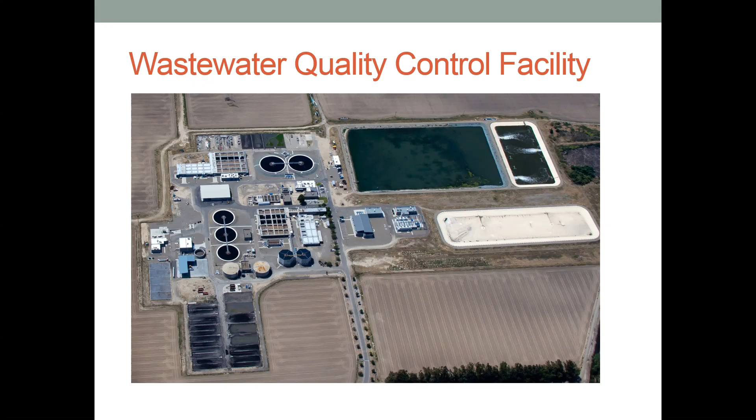The city's wastewater quality control facility, known as WQCF for short, is a 12 million gallon per day plant. Over the years, the plant has gone through several upgrades. Currently, two new digesters and a CNG facility are being constructed. Here's a view of one of the digesters being built, along with the surrounding CNG facility.

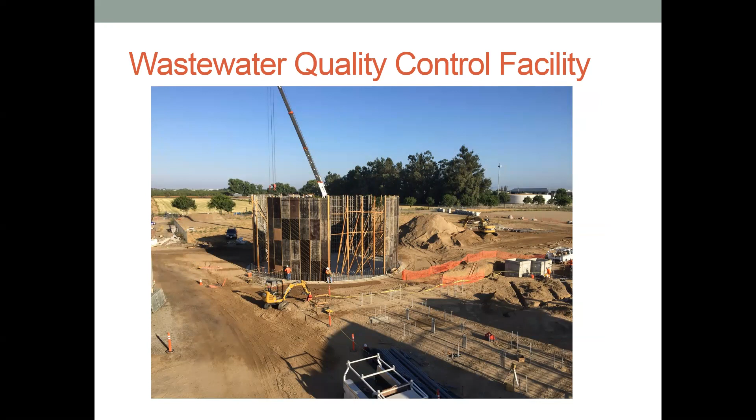The water, sewer, and storm systems of the city are composed of 300 miles of water lines, 250 miles of sewer lines, 250 miles of storm lines, 80 storm stations, 20 wastewater stations, and 19 potable water wells. A large part of these assets have been entered into our asset management program.

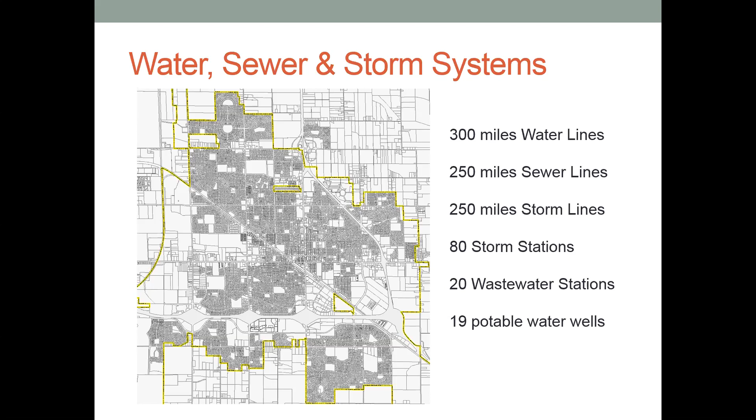The agenda topics that I will cover today are asset management lifecycle, asset hierarchy, asset naming standard, and computerized maintenance management system, also known as CMMS.

I know some of you may be thinking, why do I need this? You need it if a regulatory agency may need to see maintenance records during an audit or a violation.

Complex equipment is becoming harder to maintain. Currently, you're running your facility in a reactive maintenance mode, or paper work orders make it hard to schedule work or generate a report.

If you apply this, the facility will run in a more proactive maintenance mode while reducing the reactive maintenance. An asset management program will be the repository center for maintenance, planning, scheduling, and reporting of work orders.

Now I will talk about the asset management lifecycle. How I began my journey for the Public Works Asset Management Program was after the CMMS was newly installed. I was asked to administer the program, but having a CMMS software does not mean an asset management program exists. CMMS is just a portion of the program. The goal was to launch the CMMS software for department use, so I took the software from test servers to the production servers.

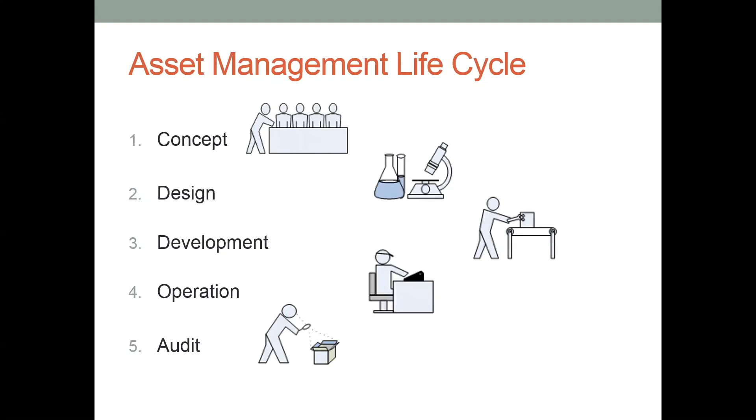I started in step 2, design, by developing the asset hierarchy. Here we organized the public works facilities into categories. Having meetings with staff for input created the current hierarchy. The goal was to set up the hierarchy in a way that fit our organization.

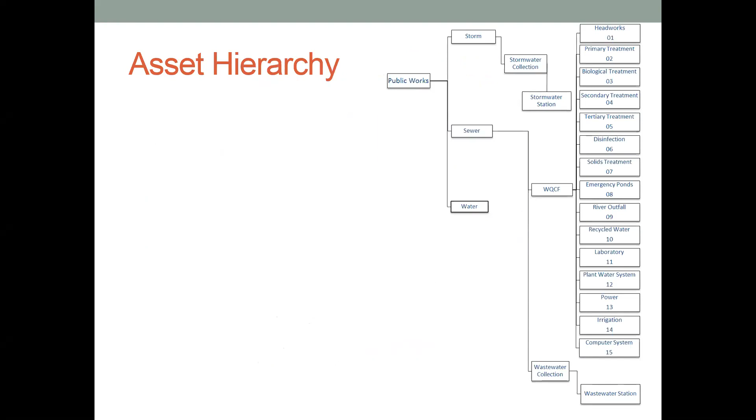Here's a closer look at a portion of the asset hierarchy with the categories and subcategories labeled. We broke down the WQCF hierarchy into plant process and gave each a number. For example, item 6, disinfection, in it you'll find the UV system.

Or item 7, solids treatment. In it, you will find the digesters. This hierarchy best fits our facility and it's easier to use.

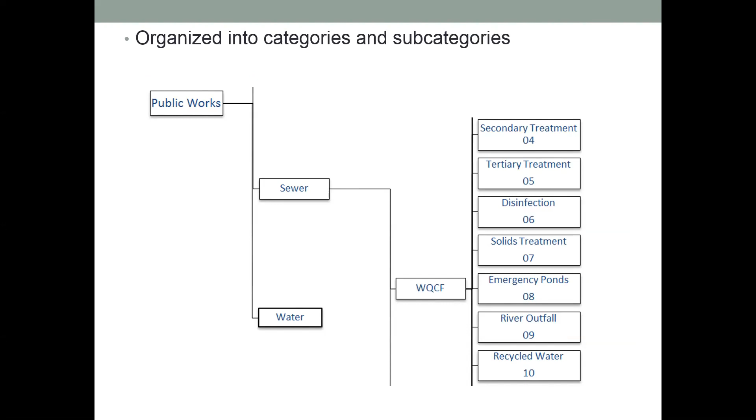In the design, all assets are identified with their attributes. This information comes from staff interviews, and we only import attributes that are created for each piece of equipment. This view shows the lowest level of the asset hierarchy. You can see individual assets such as a grinder pump.

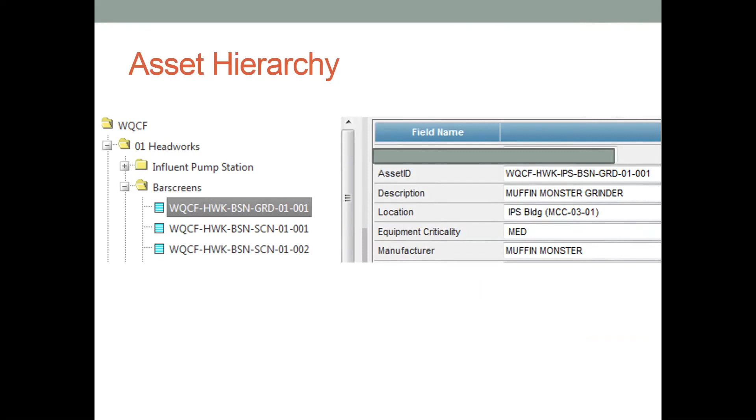What follows the asset hierarchy is the asset naming standard. Most facilities will have a naming standard that identifies a piece of equipment, also known as an asset ID. If you have one, then use it for your asset management program. The naming standard needs to be unique for every asset, and it must be able to grow when new equipment is added. The facility should only have one naming standard.

In our case, when the CMMS was initially launched, the software generated a new naming standard, so we ended up with 3 asset IDs: one for field equipment nameplates, one for SCADA graphic labels, and another one for the asset hierarchy that was created. So one piece of equipment could have 3 asset IDs.

The goal was to develop one asset naming standard for the facility. And again, this development needed involvement of staff, and the naming standard needs to fit your facility.

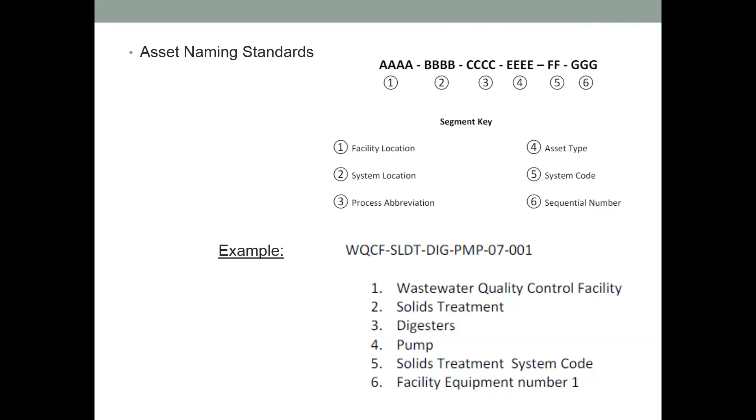For the instrument loop diagrams and piping instrumentation diagrams, the ISA naming standard was used. We selected this standard because design engineers, instrument technicians, and SCADA programmers are familiar with it.

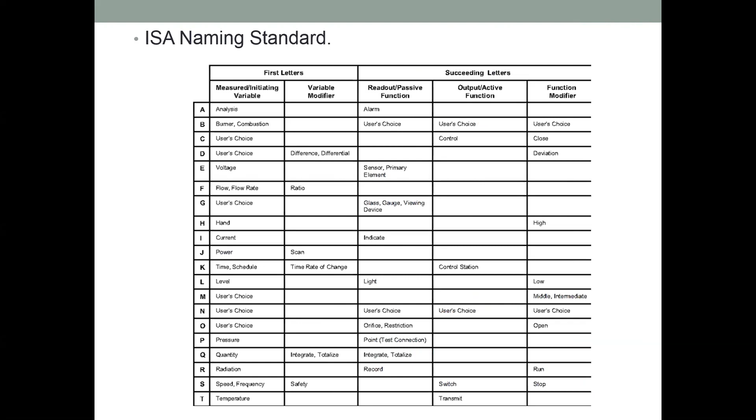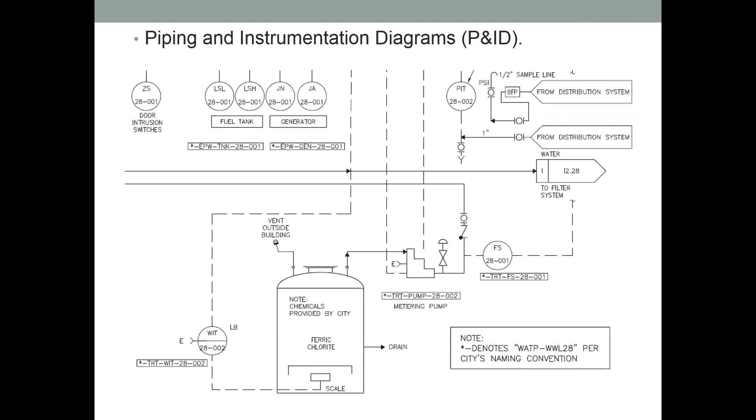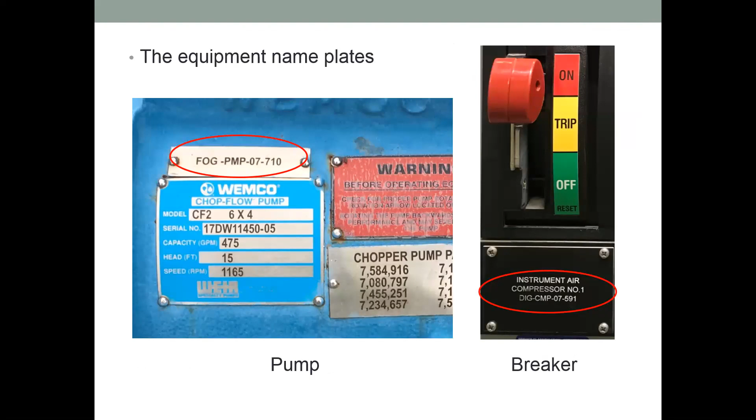If you don't have this software, it should be selected during the design step, because the major requirements of the CMMS will be developed in design, and with those requirements, a product could be selected.

The CMMS Public Works is using was reevaluated during the asset management lifecycle. The results came back that the CMMS met our requirements, so we kept the software.

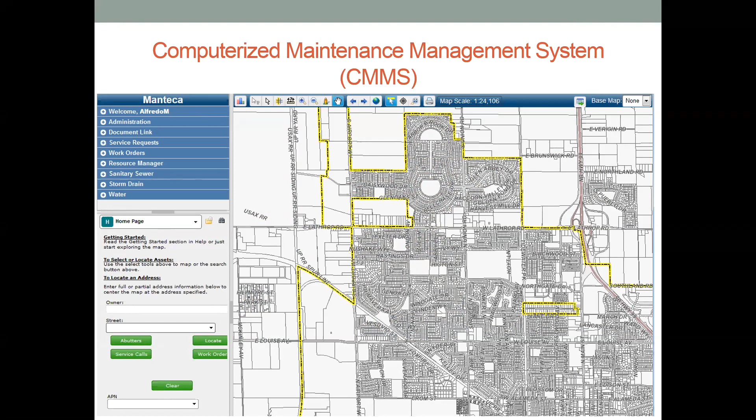There's no perfect CMMS. All are going to have some flaws, such as too many menus to navigate, or it's hard to customize the work order or program view, or there's no GIS connectivity to display maps, and some are just specialized for building maintenance only.

The software is needed before you could go to step 3, which is development.

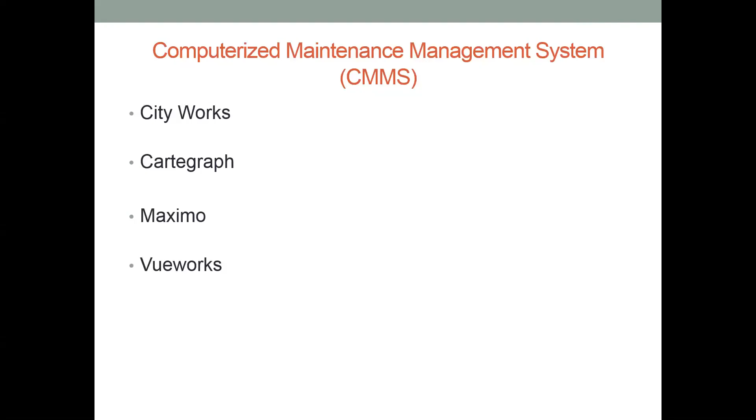During the development phase, the asset hierarchy is created based on the design. All the process containers, equipment, attributes, and data are entered into the CMMS by the asset management staff. We found out that the development phase requires a lot of data gathering and data input.

Also during the development phase, the work orders are designed and created. A work order design reflects the information maintenance staff and management want to store. Then the work orders are entered into the CMMS database by the asset management team.

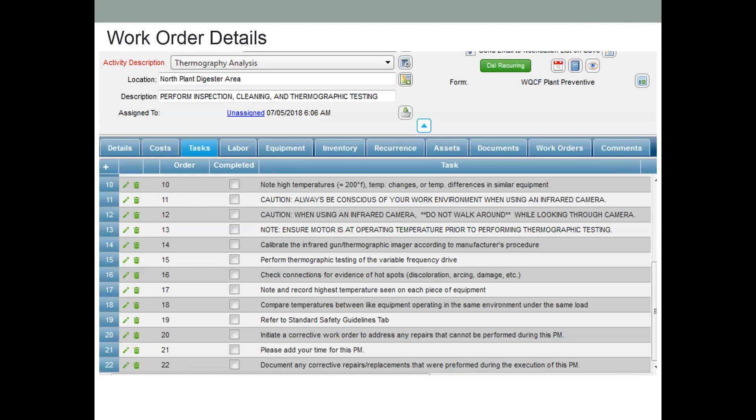All the job steps were developed by having discussions with maintenance staff and doing research on O&M manuals. This is another detail that takes a lot of time and research to develop and put together, and it helps the maintenance staff complete their job.

Next is the scheduling setup for preventive work orders. The software will generate work orders at a specific date in the future once the schedule is set.

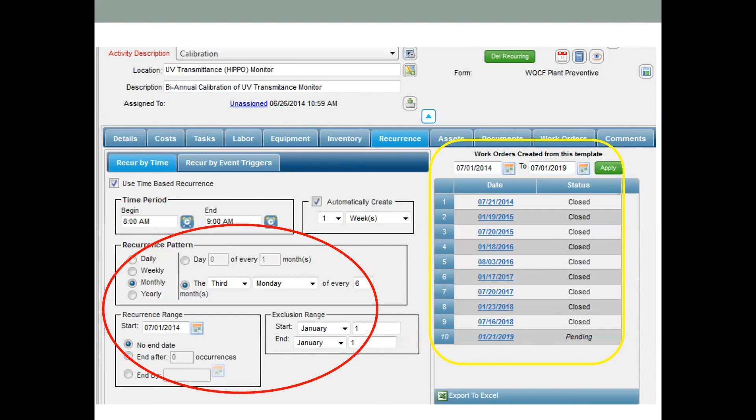After setting the work order schedule, the CMMS is ready to generate work orders, which moves us into step number 4, operation.

In the operation phase, the CMMS is launched for staff to use, so now your asset management program has started to run.

Following is a work order that will be filled out by maintenance staff. The red circles highlight the areas of input that staff will put in.

This is one of several views in the CMMS program where information can be viewed quickly, and individual work orders can be opened up to see what they contain. Being able to quickly pull up information on equipment without having to go through paper documents is a main feature of the CMMS.

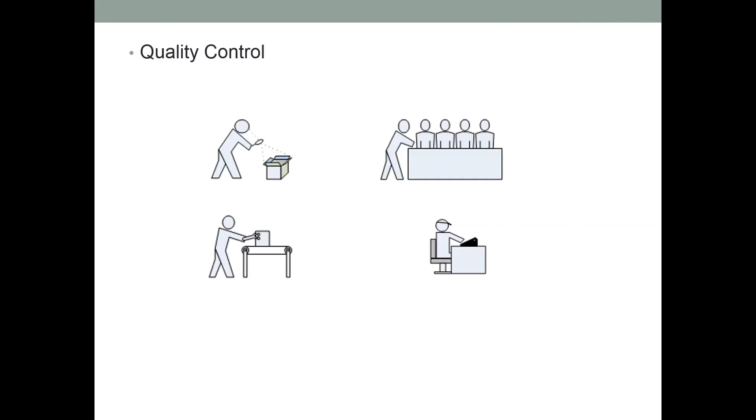In closing, asset management lifecycle, asset hierarchy, asset naming standards, and the CMMS software all compose an asset management program.

Where is Public Works today with the program? I have posted here some statistics of what has been included into our asset management program. We have 800 miles of wet utilities,

3,500 assets, 80 storm stations, 20 wastewater stations, 27,000 work orders are currently stored in the CMMS, and the future development of adding 19 potable water wells will be done.

Thank you for your attention. Any questions?

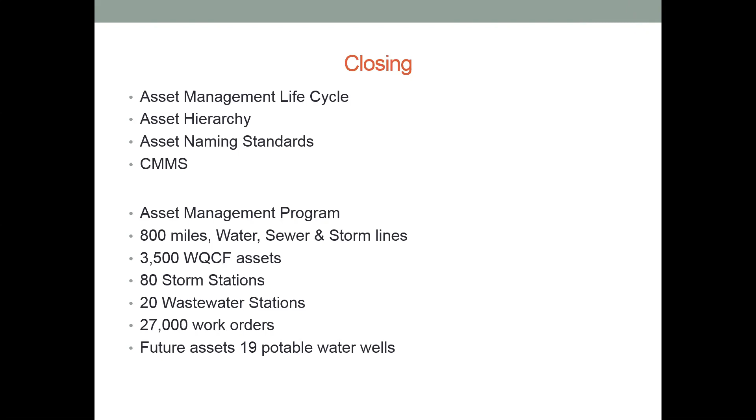I haven't seen any yet, but I do have a question for Alfredo. It sounds like you guys have gone through a lot of effort getting the CMMS in place. Do you guys have a planning module that's already in place, or in the future you might purchase a planning module for the CMMS?

So when you're saying a planning module, is it a scheduling module? Maybe a scheduling module. Yeah, the scheduling module is included in this product, so that's standard with the CMMS.

Are you using it? Yeah. Okay, great. Yeah, we're using it for our preventative maintenance work orders, and we basically set the frequency, and once we set them, they'll be generated. Okay.

So that's a very good question. To get it to this point, we've been at it for at least 5 years, to get it to the point that we're at right now. And we're still developing it, because as the system grows and the city and all the assets grow, we still need to tweak the CMMS.

Alfredo, follow up on this question: how long did it take you to become proficient at CMMS?

Oh, so that's good. I mean, this is why I wanted to put this presentation, because I wanted to share my experiences. At the beginning, I was a novice at it, but along that 5 year process, I've become and gained more experience and become proficient. I still feel I have a lot to learn, so my development's still happening.

So the agenda would be to talk a little bit about the background of Roseville, if you're not familiar with it, where it is. I'll go through the approach that we used for our condition assessment, and then present some inspection results, and then close it out with some surprises and lessons learned.

So City of Roseville, if you're not familiar where it's located, it's near Sacramento, a little bit east. The city owns 2 wastewater treatment plants. One's Dry Creek Wastewater Treatment Plant, the other is Pleasant Grove. They're a regional facility, so in addition to Roseville, they provide wastewater service to other towns, Loomis and Rocklin, and unincorporated Placer County.

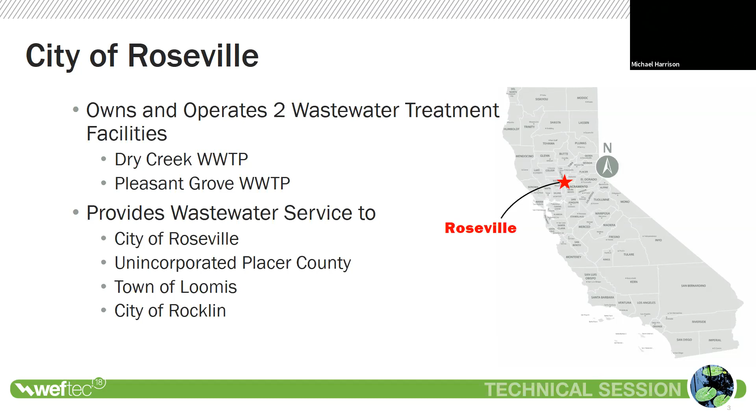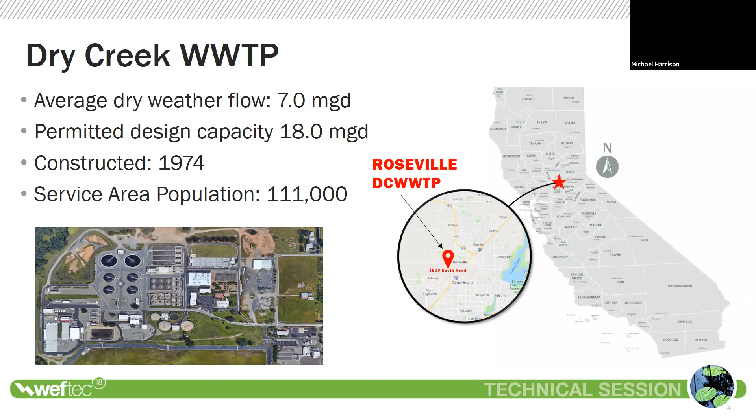The first treatment plant is Dry Creek Wastewater Treatment Plant. It's the older of the two wastewater treatment plants. It was originally constructed in the 70s. It has been expanded over several years in various phases and has a lot of facilities there. This is the one that requires the most inspection to see how things are going.

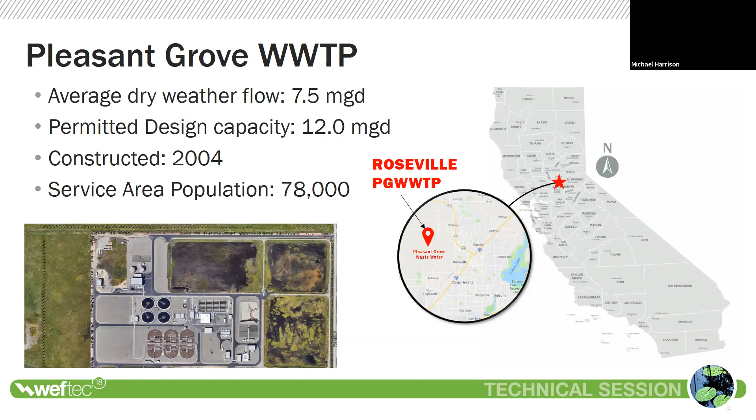Pleasant Grove is the newer plant, constructed in 2004. This treatment plant was really constructed to serve the new future growth in the Roseville area. It's a rapidly expanding area, and this one was designed to expand out and is the newer of the facilities. It's currently going under design to add digesters, a primary clarifier, and a vehicle fueling system using digester gas, cleaning it and using it for compressed natural gas filling. So it's going through a lot of projects right now.

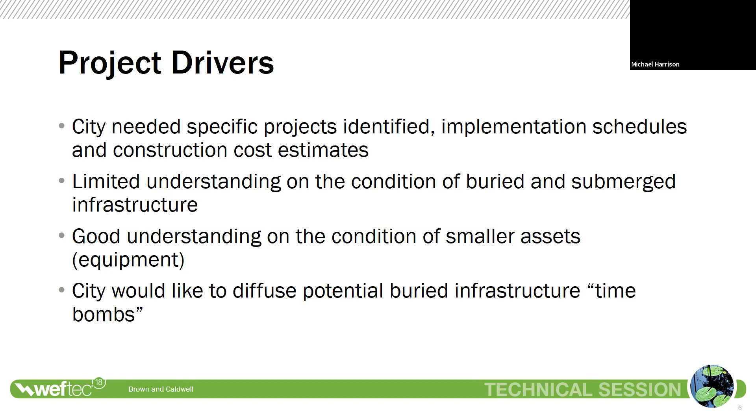So they really wanted to, as it says, defuse those buried infrastructure time bombs. They were very concerned with it. So that was the driver of the project to do a condition assessment.

Challenges: it's very expensive to really do a physical condition assessment. It's a very lengthy, complicated process if you really go into the details of looking at all your buried infrastructure. You need specialty sub-consultants, special subject matter experts to really go into the detail on the concrete and the steel. It involves major shutdowns, you need a general contractor to help do the work. There's lots of different inspection technologies, so it's really what do we use and where do we apply it, and actually collecting useful information that they could use to really help them manage their aging assets. So those were the challenges.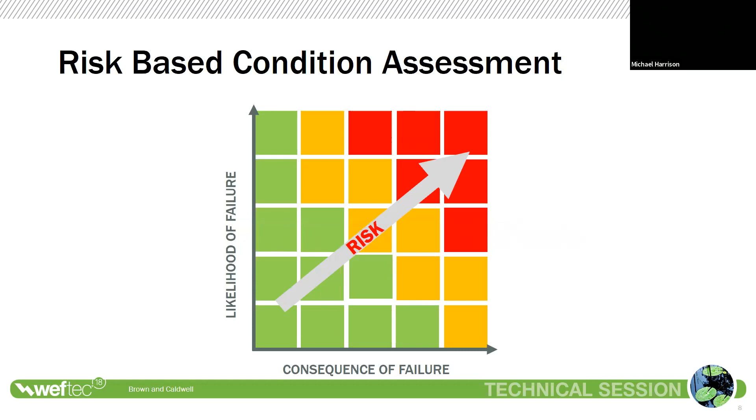The first level is level 1, which looks at all the data: the age of the assets, theoretical useful life based on age and materials, and maintenance history of larger facilities at the plants to determine if they're doing a lot of maintenance or not on the major facilities.

At that point, we could screen it out. We evaluated the assets by determining a total risk score based on likelihood and consequence of failure. The likelihood of failure at this point is theoretical, since we haven't looked at the facilities yet. The plan was, if there were any obvious replacements identified in level 1, we'd move to level 2.

Level 2 is more expensive. It requires subject matter experts to go out in the field to visually look at all the facilities. Once on site, they would assess the condition, reassign a likelihood of failure score, and screen it out. The final level was the physical condition assessment.

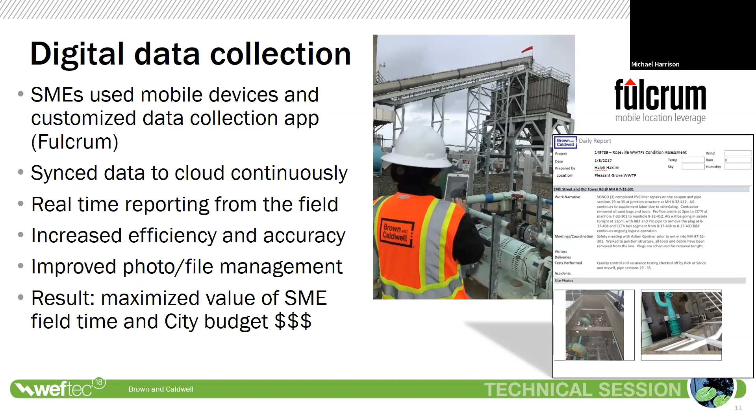Level 2 results: at this point we looked at the condition of the facilities at both plants and revised the likelihood of failure scores, which revised the overall risk score. We confirmed which assets we wanted to do level 3 inspections on, identified RRR—rehab, repair, replacement—projects based on our visual inspections, and also identified minor repairs.

So we've gone through level 1 and level 2, prioritized assets, and we're continuing now with level 3. As we go, we build this database. This is a clip of condition scores and information we collected that would be stored in the database.

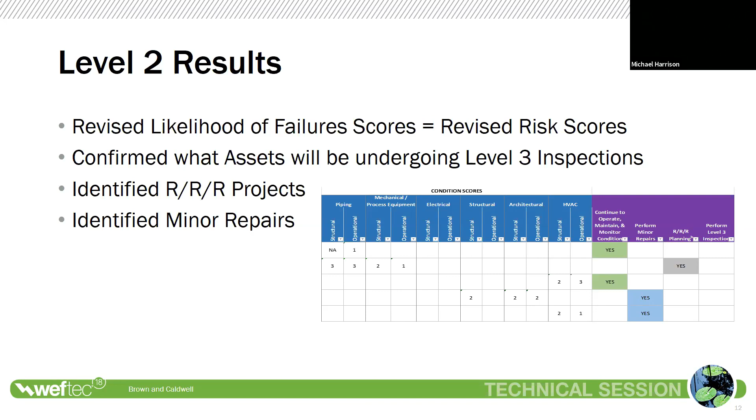Level 3 was a large part of our project and involved a series of partners, including Brown and Caldwell and the City of Roseville. We had Boss Labs, which did the concrete evaluation and inspection, and Blackstone Group, which evaluated the metals and steel. We had National Plant Services, a firm that helped do the CCTV television inspections of all the areas we needed to look at. Finally, Auburn Constructors was the general contractor we used for the process.

So this is a snapshot on the upper right of a 3-week look-ahead schedule, but this was a very intensive part of the work.

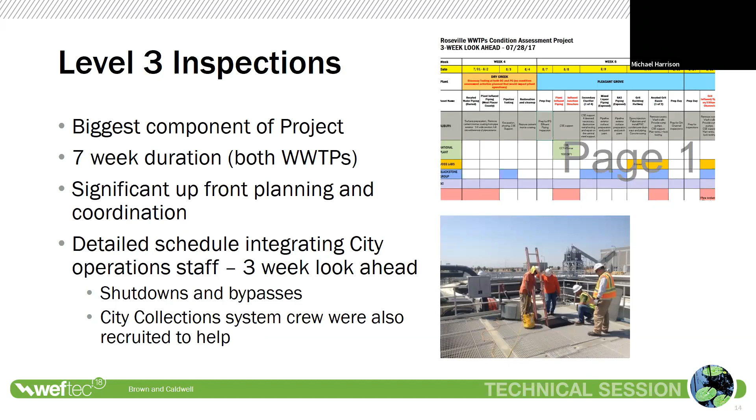I wanted to show you some examples of what we found in our inspections. This first one is the influent pipeline, and this was really the biggest surprise. I mentioned earlier they wanted to eliminate surprises and defuse time bombs. This inspection indicated they had some really aggressive corrosion and loss of concrete pipe. What you see on the right is the crown of the pipe with the reinforcement bar exposed, so that tells you right away they've lost quite a bit of concrete. Originally it was supposed to be a T-lock PVC lined pipe that really wasn't, so this section was inspected and we saw this.

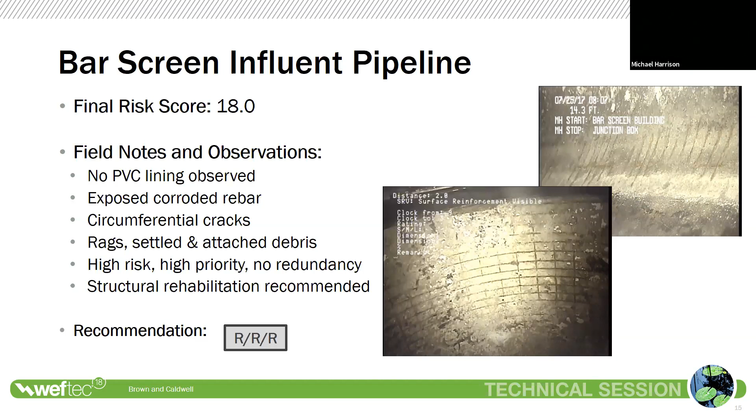We immediately recommended a replacement repair on this pipe section, which is in the process of happening right now. This was very good to see. Part of us was relieved that we caught it, but the city was a little concerned, so they actually put a large plate on top of this influent pipe just to protect it until they could repair it.

This is another example, an effluent pipeline - the influent pump station effluent pipeline, conveying raw sewage from the pump station to the screens and headworks. We weren't able to inspect the inside of this pipe since we couldn't drain it based on the configuration, so we went on the outside. We chipped away the concrete and did the inspection from the outside using our metals specialist to determine the thickness and corrosion of the pipe. This one actually was good news - the pipe was in really good shape, so we recommended to continue to operate, maintain, and monitor it.

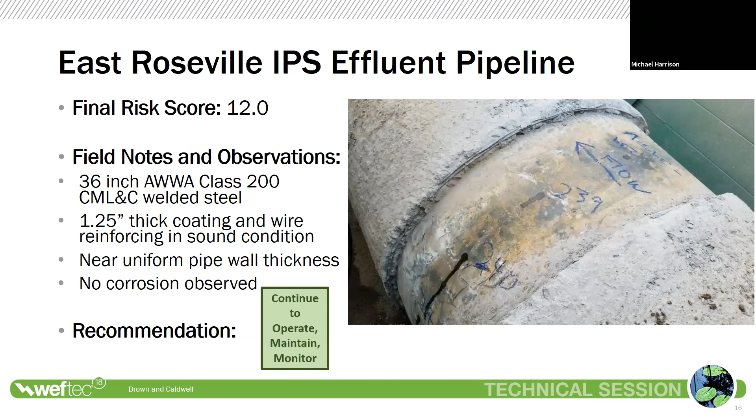Here's another example, the grit influent channel. One thing I failed to show is there's a risk score at the top of each of these slides, a function of the likelihood and consequence of failure that we determined, which ranks the projects in the end - I'll show you that printout. This influent channel was basically not operating correctly. When we tried to drain the channel, they had to empty it with 10 vactor loads - it was filled almost to the top and they weren't really aware of that. What happened was the diffusers, which use air to mix and keep things suspended, got clogged by materials that settled and filled up the basin. This is upstream of the grit channel.

One of the interesting things about this grit influent channel is that we actually modified their maintenance practices. We'll do a replacement modification, but defer that, and in lieu of that, for a while they can conduct more aggressive maintenance, vactoring out the influent channel at a more frequent period. So this is another example of changing maintenance practices to prolong the life of the assets.

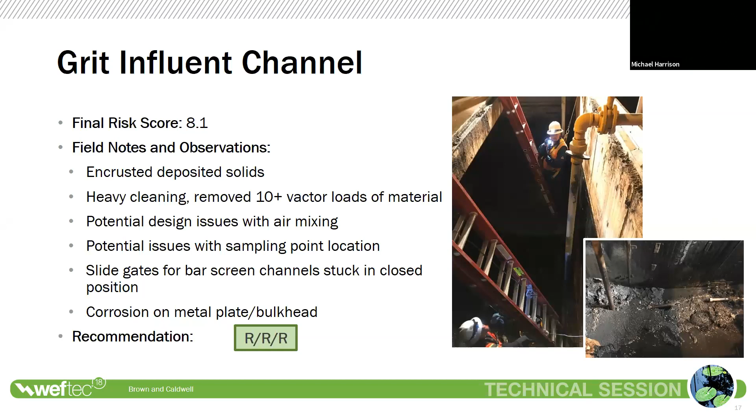This is the primary sedimentation basins, where we took the basin out of service and did concrete core samples and sounded the concrete to determine the thickness and condition. This wasn't a surprise - these are the older primary sed basins. We did recommend replacement, but long-term rather than short-term, along with a rehabilitation - the RR would be a rehab of the concrete. The cover over the rebar was around 2 inches, and the low strength concrete was determined at 4,800. There was a little scaling, but this was just an example of using the concrete specialist to make a decision on how long the concrete is going to last.

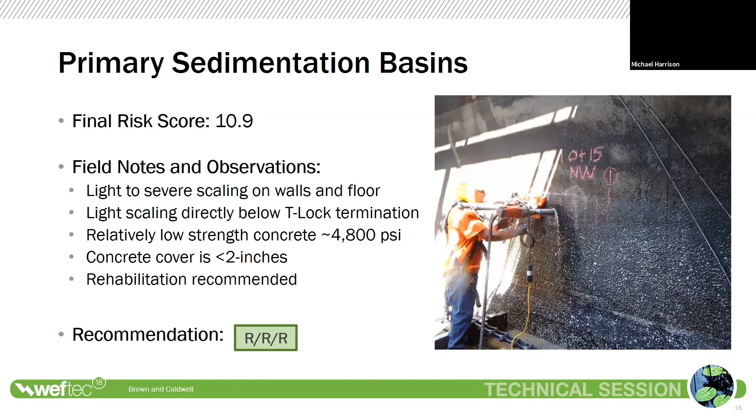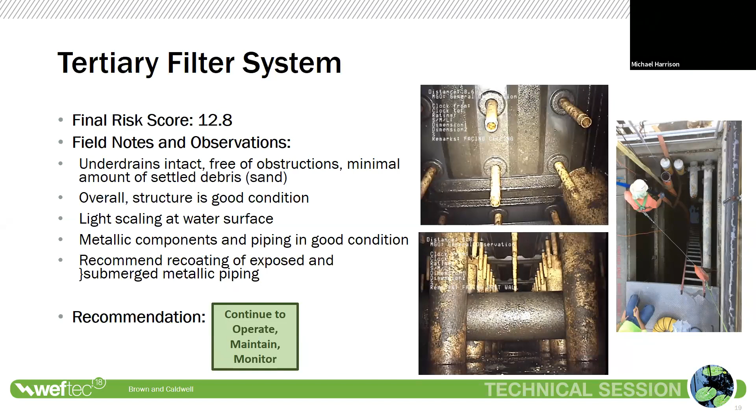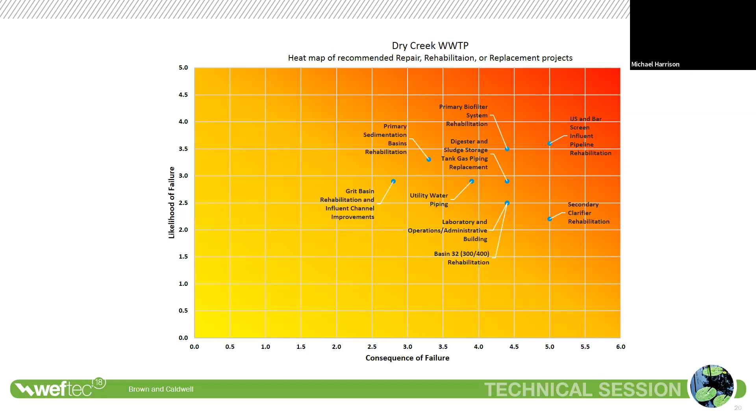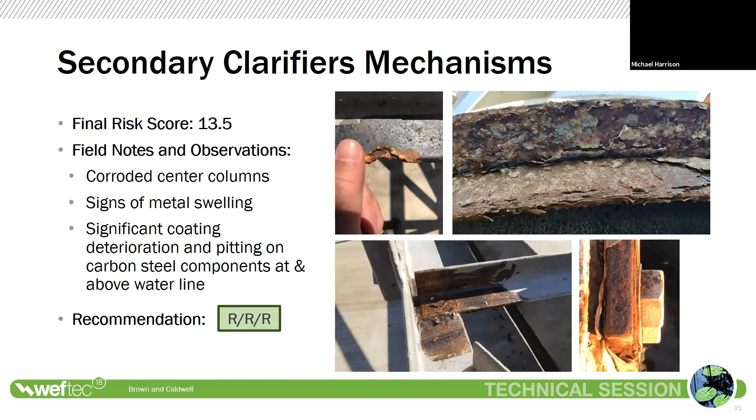I'll give a couple examples of Pleasant Grove as for the next project. Pleasant Grove was a little bit easier to do because it was a newer facility, but this was an interesting story. We did a level 2 evaluation of these secondary clarifiers, and it seemed like it was an imminent means of falling apart right away based on our visual inspection. But upon further evaluation at level 3, even though it looked really bad, they still had a little bit of life in this system. You'll see crusted, corroded metal, but in reality, there was plenty of metal left. So there's a replacement project for this, but based on our level 3 evaluation, we were able to put off the actual project for a few years to really extend the life of this as much as we could.

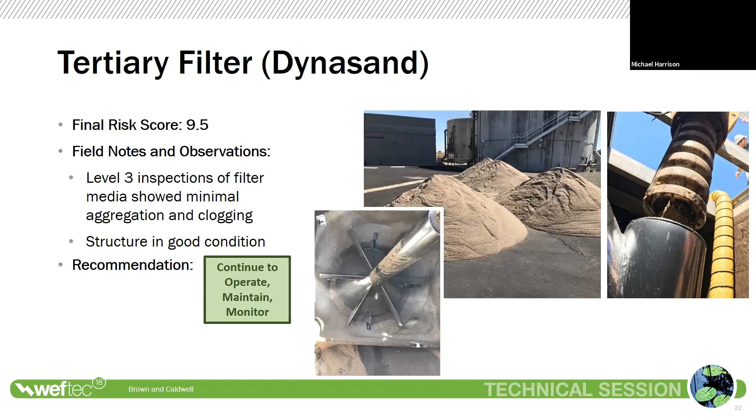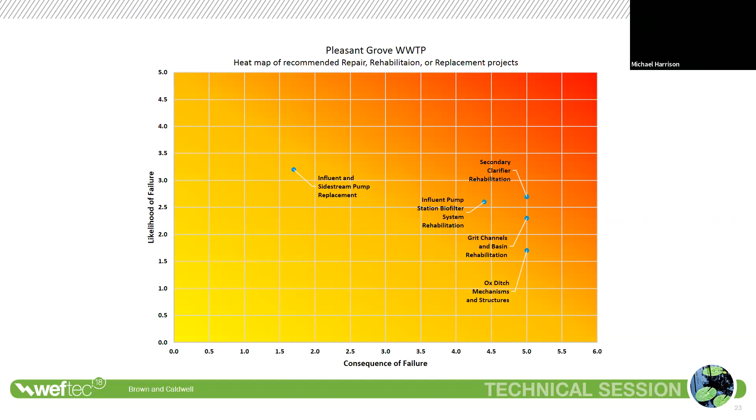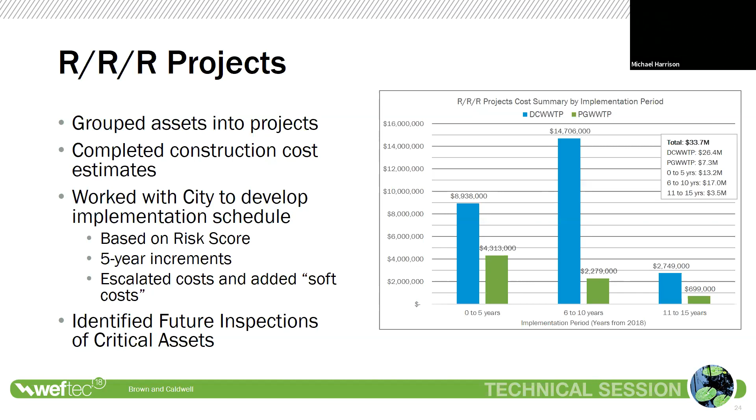The other thing we did was identify future inspections. The city didn't have unlimited money, so we did as much inspection as we thought appropriate for the highest priority assets. For some assets, we recommended the city come back in a few years to re-inspect based on criticality and condition. So we had that recommendation for them, and that's how the project was wrapped up at this point.

Like any project, there's a lot of lessons learned, so I just wanted to summarize a few before I close out. For the level 2 visual, mobile data collection is a must. For anyone doing this, it's really an efficient way of using people's time out in the field if they can do direct data import. The other thing is to maximize the time out in the field for those folks, just to look at the site.

Interviewing staff is very critical because many times there's information that's not in your asset management system that you can gain from staff interviews on condition. So that was very useful.

The other thing, and I think Alfredo mentioned this, was naming convention. Having a consistent naming convention is very important. We had some numberings that were different and off that caused some confusion. So be very careful with the naming.

For the level 3 physical inspections process, always use a local contractor familiar with the facility. It makes life easier for the staff. Make sure the treatment plant staff is engaged early, so they can actually look and test ride some of the shutdowns. It was very instrumental for them to isolate pipes, because in reality that could happen in the future, to learn from those facilities and how it worked.

Have a contingency plan for that process, allow adequate time for that type of process, and then take advantage of the shutdowns and diversions. They typically take basins out of service, so it makes sense to time your inspections when that happens. And then finally, include a repair cost allowance with the project.

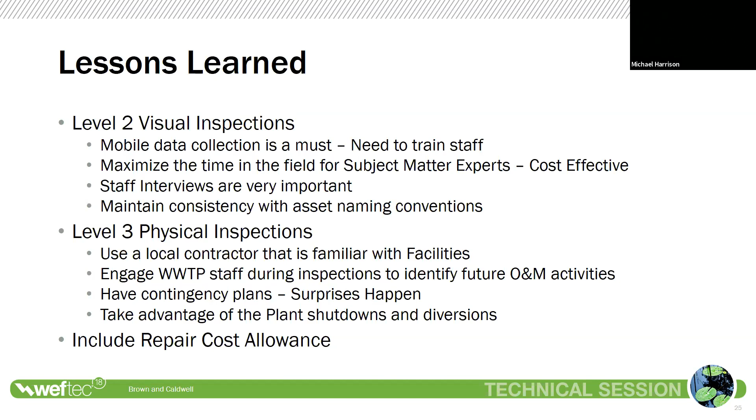So that's really the summary of my presentation. I want to thank you for your time. And I'm going to put this screen back in the court of Randy and see if there's any questions.

All right, thank you, Michael. That was an excellent presentation. You actually recently went through a very similar inspection of our facility, and like you mentioned, we found lots of surprises. We do have a few questions posted by the participants.

Another question: could you elaborate on your construction cost estimating process? So what we did is, at the completion of our condition assessment, we essentially identified specific projects, and the first step was to decide if it was a repair, replacement, or rehab. Once we identified if it was a rehab, we would create a detailed project description that we'd give to our cost estimators, and they would do a higher level cost estimate. So our estimators went through and did a takeoff with some contingency. We had quite a bit of budget to really make our estimators do this job, and there was a few back and forths, but it really wanted to give a reasonable cost estimate.